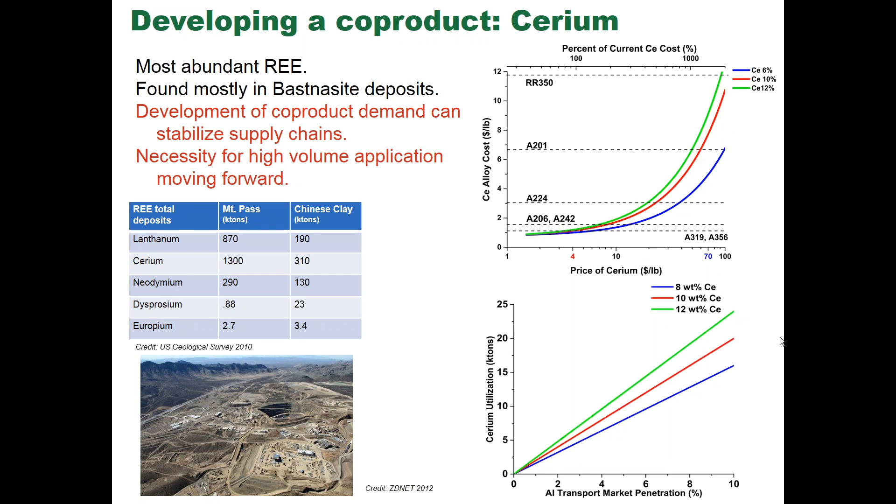And if there is a penetration into the transportation market, it doesn't take much of a penetration to use substantial amounts of cerium, and therefore meeting the goal of the Critical Materials Institute as far as stabilizing supplies of the material. So that's a little bit of the background.

We know a couple things about cerium. Some of this is known from some very small research studies, and some of this was developed through some work that was done in powder metallurgy some 30 years ago.

When you mix aluminum and cerium, you get a highly stable intermetallic, Al11Ce3. And the breakdown of that intermetallic does not begin till about 1,000 degrees C. So it's very, very stable at high temperature. The intermetallic phase is resistant to coarsening.

And what we're really trying to say is that cerium has no real solubility in the aluminum phase, and so it's got nowhere to go, and so it's thermodynamically trapped. The original research was in powder metallurgy, and the powder metallurgical results point to a possibility of fairly high tensile strengths up to about 230 degrees C. So it seemed like a possible application for a cast alloy.

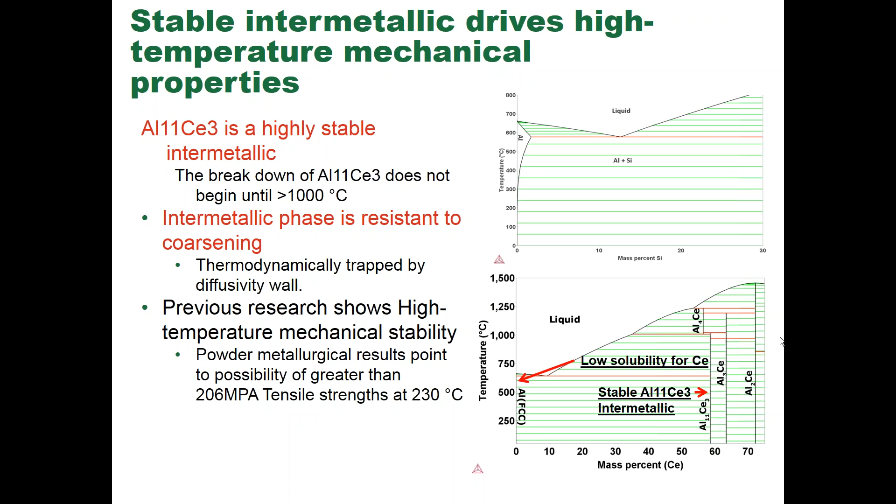Here we see some of the original microstructures that were done, and you should be able to see the various scale bars on there. What we have is a very, very small aluminum-cerium phase. When looked on edge, the rods are about 100 nanometers in diameter. When you add cerium in percentages of between 8 and 10%, you have a very, very high phase fraction of cerium in the material. The microstructure is interconnected.

If you put too little cerium in the alloy, the microstructure doesn't connect very well, and so you have denuded areas, but typically above about 7% cerium, that does not happen. And really you have sub-micron scale laths that define the shape of that intermetallic. And so part of what we were trying to do is develop a cast alloy that had high temperature properties, and was affordable and was castable.

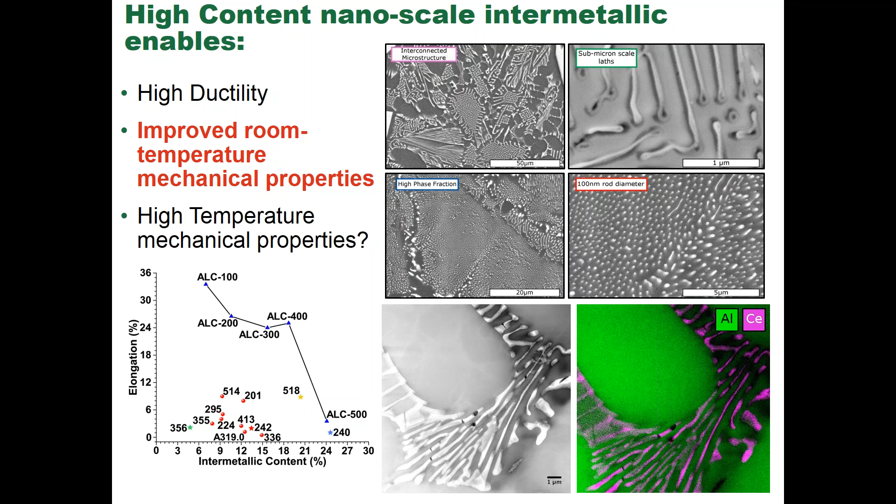In the lower left-hand side, you see the relative intermetallic content of some of the other alloys that are out there. These alloys do not have unusual amounts of intermetallics, but the intermetallics that are there are much more stable. So here's a TEM picture showing a little better that this microstructure is primarily an aluminum-cerium phase in an aluminum alloy. And you get an idea of the size. That's a 1,000 nanometer scale bar on the bottom, and pretty uniformly distributed through the alloy.

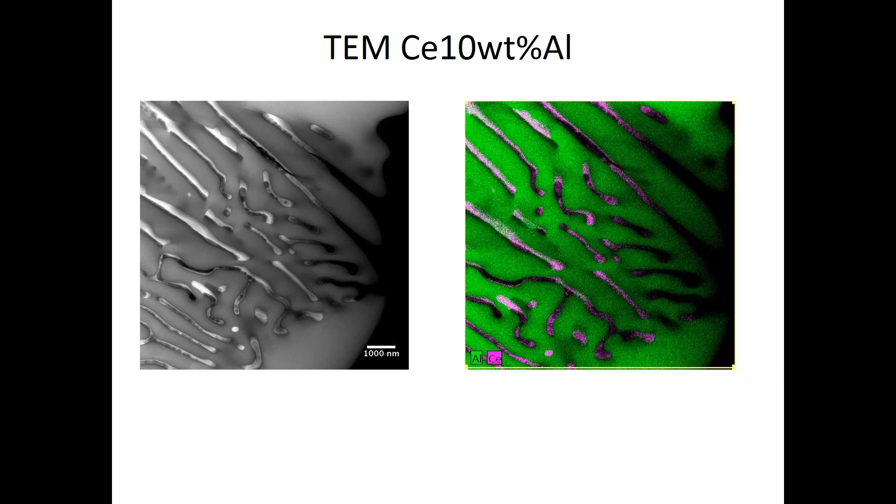There's not a lot of phase diagram information, although Mondolfo did some years ago that we believe turned out to be fairly accurate. This is a computed phase diagram done by the folks at Lawrence Livermore, and we see a lower melting eutectic point at about 10% cerium. That really gave us some hope that we would have an alloy that you could get a substantial amount of the alloying element in and not create a lot of difficult casting problems because of it.

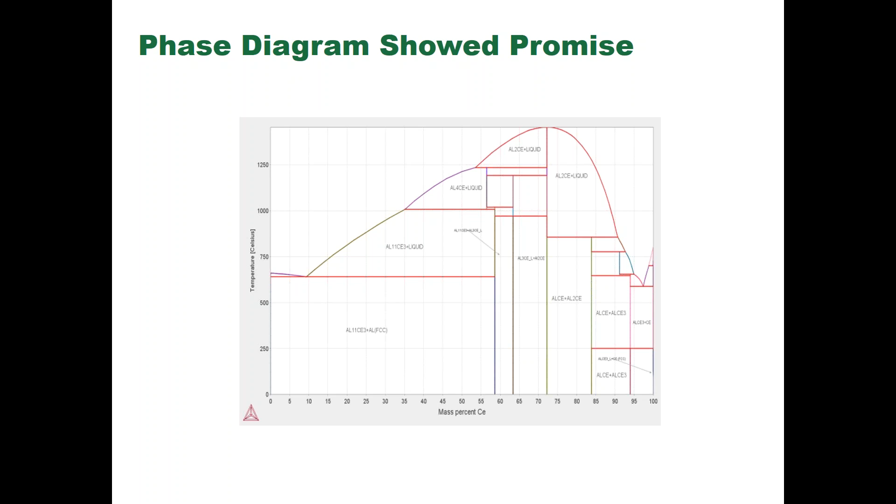I guess my reputation preceded me a little bit because the program sponsors didn't want to have a difficult to cast alloy. And so we started this with really a pilot program to help understand the castability of the aluminum-cerium alloy system. And it turns out it's really pretty good. The alloy is castable over a broad range of compositions. Not only do we add cerium, which gives us high temperature strength, but we add other alloying elements to improve the room temperature strength as well, and they also improve the high temperature strength when added properly.

We've cast over 30 different variations of the alloy. Some have been uncastable. Most have been castable. Some have developed pretty poor mechanical properties. Some have developed quite extraordinary mechanical properties. We'll discuss more, but the alloy is tolerant to really high mag contents. And so people are concerned, well, you're adding cerium, which is a high density material. That is going to make my casting weigh more. We can completely counteract that by adding enough magnesium to bring the density down to that of pure aluminum.

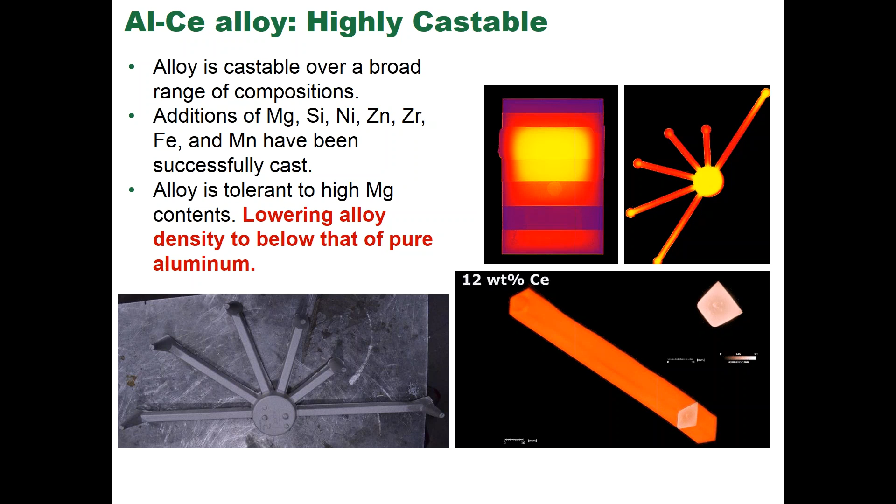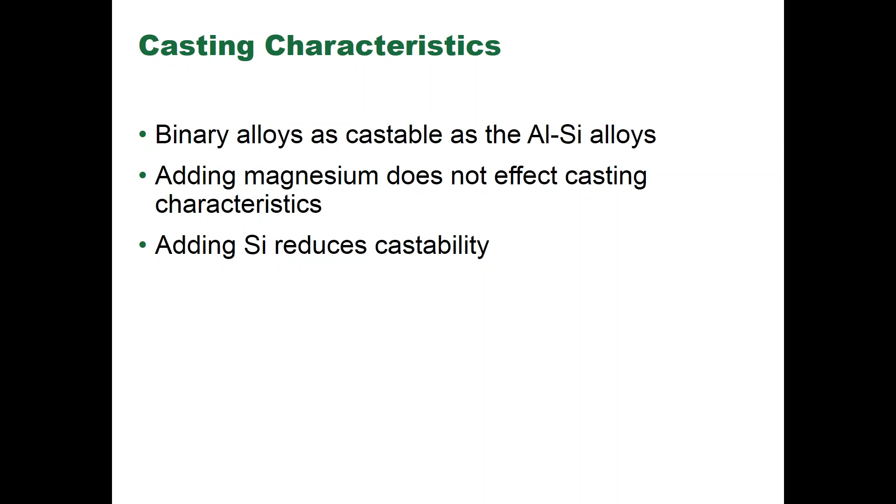Interestingly, adding magnesium does not really affect the casting characteristics. We've tried some very high magnesium levels in these alloys, and it has been successful. Ironically, for those of us in the foundry business that cast a lot of aluminum-silicon alloy, the element that has the biggest negative effect on aluminum-cerium alloys from the standpoint of castability is silicon. You're more effective in copper alloys than in silicon alloys, which is interesting, and we're not sure of all the reasons why that's the case, but we've been able to demonstrate it a number of times.

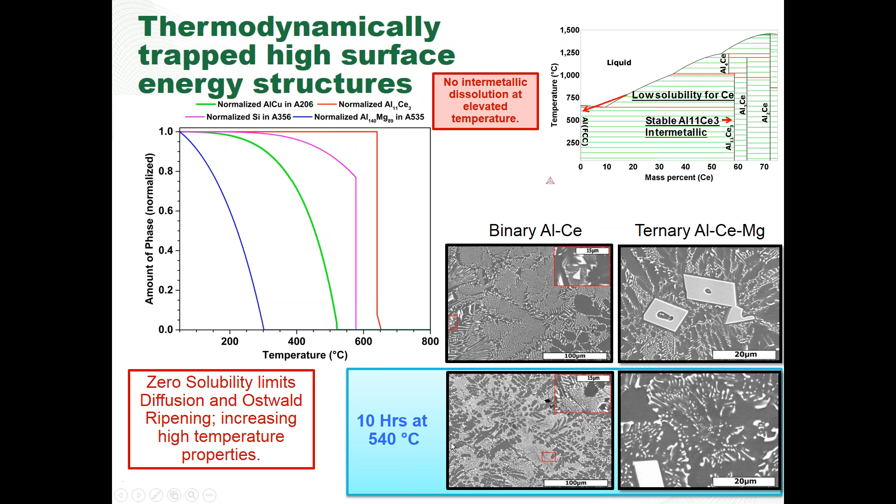at 540 degrees C. So at temperatures that high, you have some homogenization of the aluminum-cerium structure, as you do with the magnesium, but the magnesium actually stabilizes that a little bit. So you don't have any growth, you don't have any coarsening, it doesn't disappear, it's still all there after exposure for a long period of time.

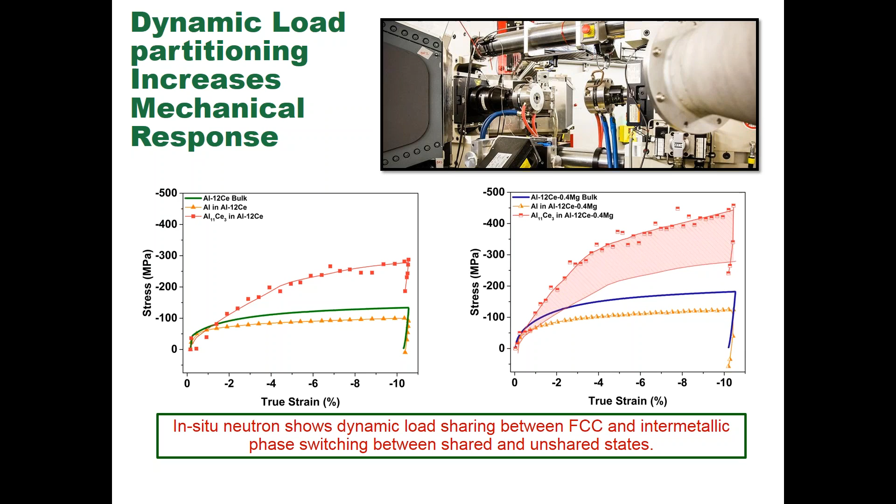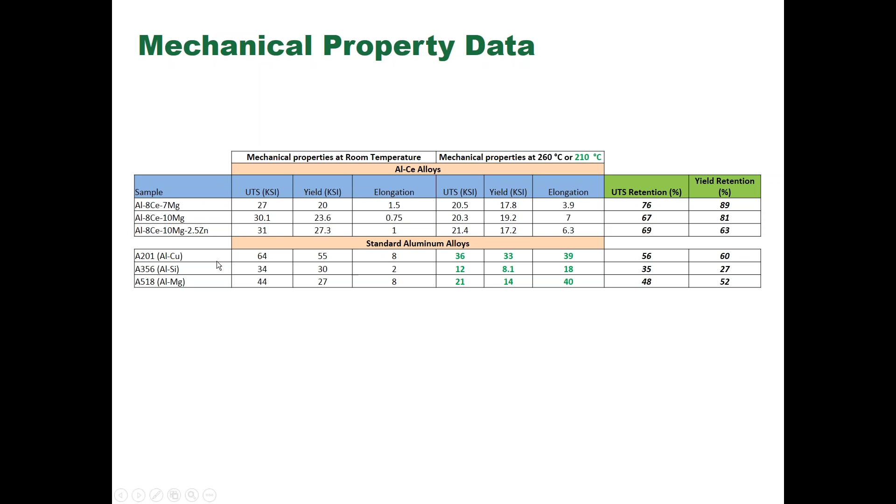So, as I think I said, we did somewhere between 20 and 30 different compositions of alloys using a lot of different alloying elements, and some of these materials responded well to heat treat, and some didn't. I'm going to go back one slide because I will add that these are as-cast properties for the alloy at both room and high temperature for the aluminum-cerium alloys. For the conventional alloys, these are all heat-treated properties. So we're getting very, very good mechanical properties actually without needing to heat treat the alloy.

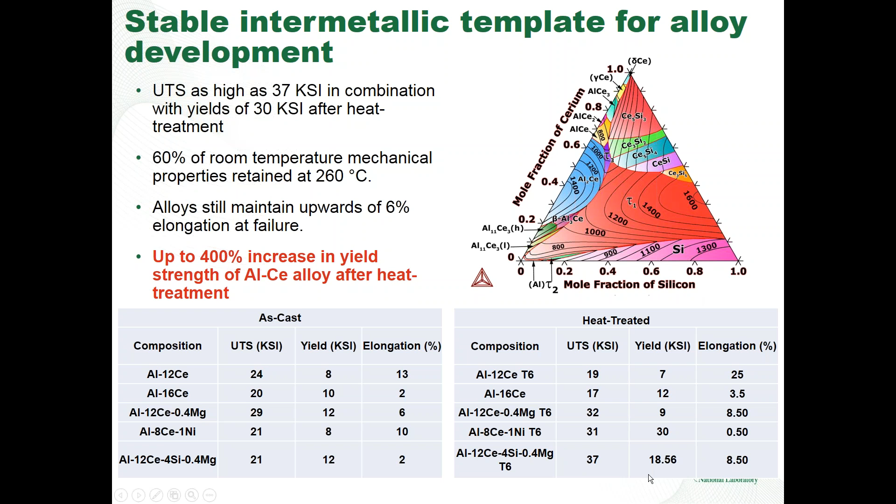And when I talk about heat treat, I'm talking about a typical type of T6 heat treatment where you're heating it up to 1,000 degrees F and then you're quenching it. So they really don't have much of a response. Once you start adding elements, then you get a lot of response to the heat treat, because you end up with more traditional kind of heat treat response. You get a good response in the cerium nickel series. There's a lot of work that has to be done on heat treat on some of the alloys, particularly those that are not primarily magnesium alloys.

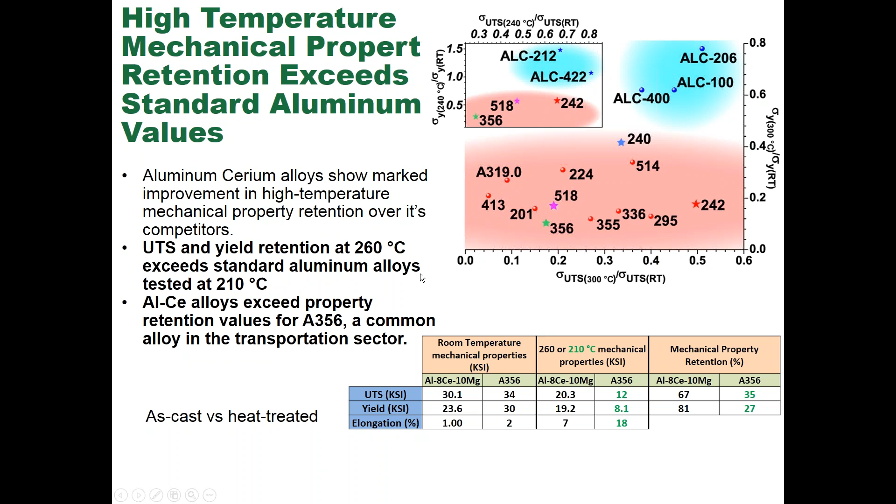Again, this bottom graph is kind of a rehash of the last slide a little bit, but room temperature mechanical properties in a 10 mag alloy, and they're pretty close. Yield strength is higher in 356, but then when we look at high temperature properties, it's very good. And again, the aluminum 8% cerium alloy was not heat treated at all. Those are the as-cast properties.

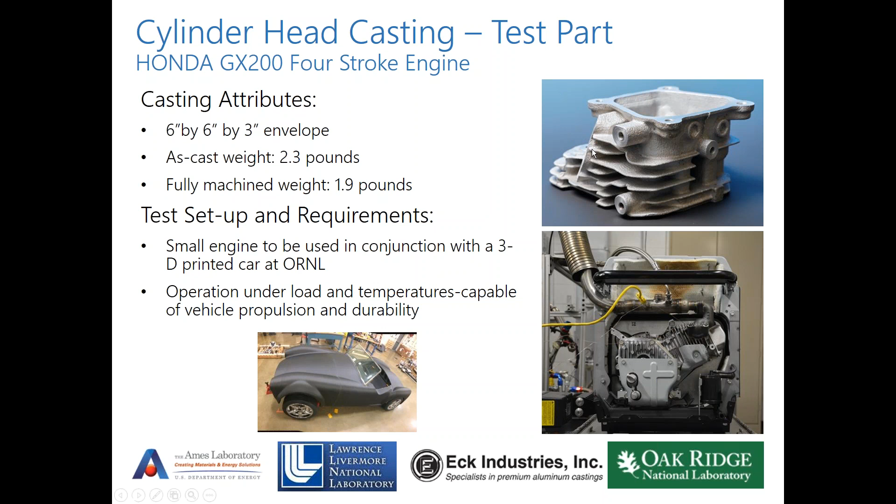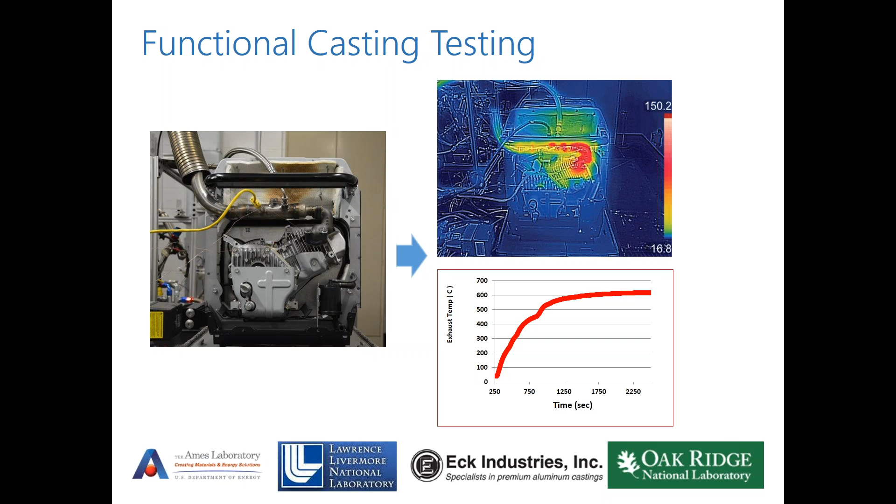And then it was tested. The vehicle was actually driven. There were exhaust gas temperatures of at least 600 degrees C, and everything went well with the demonstration. There's work going on with our conventional customer base in these alloys in projects of their own that we're looking to participate in.

One of the very interesting things, at least to the team, is that when you take a typical cast piece of the 8 cerium 10 mag alloy and you extrude it and you align most of the aluminum cerium, you get very, very high mechanical properties. And again, this is except for the temperature that went into the extrusion billet in order to allow it to extrude. It had tensile strengths in excess of 50 KSI with a 6% elongation in the extruded alloy.

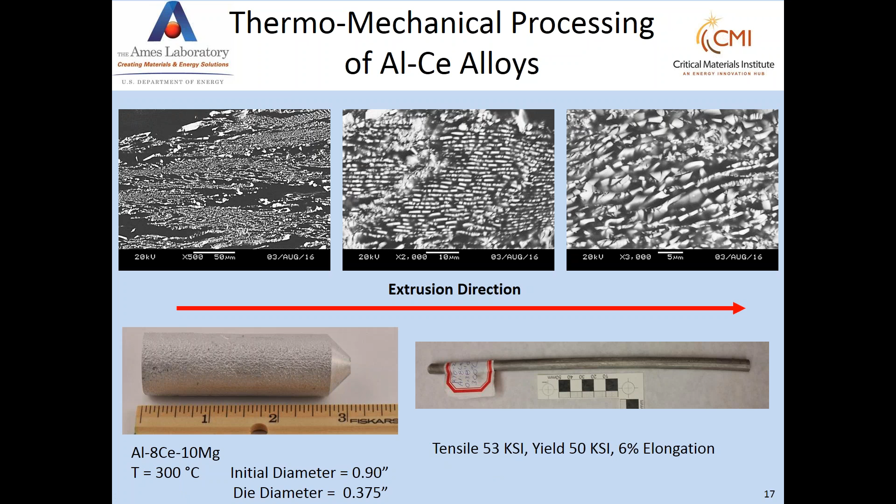So this is a combination of some alloys that are ready to go, some that continue to need development. We are continuing development to improve the room temperature mechanical properties. All of this work was done without making any attempt to do grain refining or modification of the structure. So that's work that's going on right now. We're trying to find optimized heat treat for a number of these alloys.

Again, the response in general, because cerium slows the diffusion of almost all the elements involved, we will likely need to heat treat at fairly high temperatures in order to get anything to move. And we're still trying to discover and quantify missing alloy phases that should be there, that we're not seeing, but we know they're there because of the effect they have.

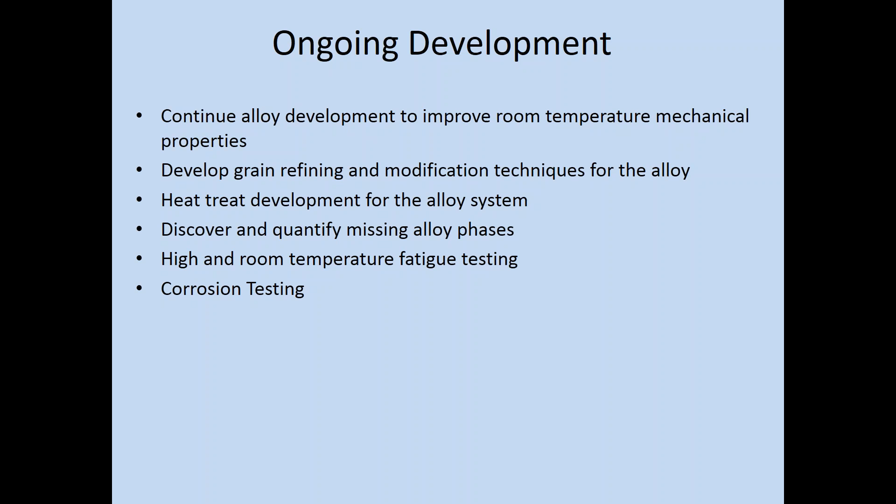We're doing high and room temperature fatigue testing as well as corrosion testing. Although Oak Ridge did some preliminary corrosion testing and it was very, very favorable, so we don't anticipate any problems there. So kind of in summary, these alloys are highly castable, tolerant to casting defects. If you cast any of the binary alloys or the alloys that contain magnesium, you would say that they cast just like 356 does. The combination of your phase constitution and microstructure enables unique mechanical properties, certainly at high temperatures.

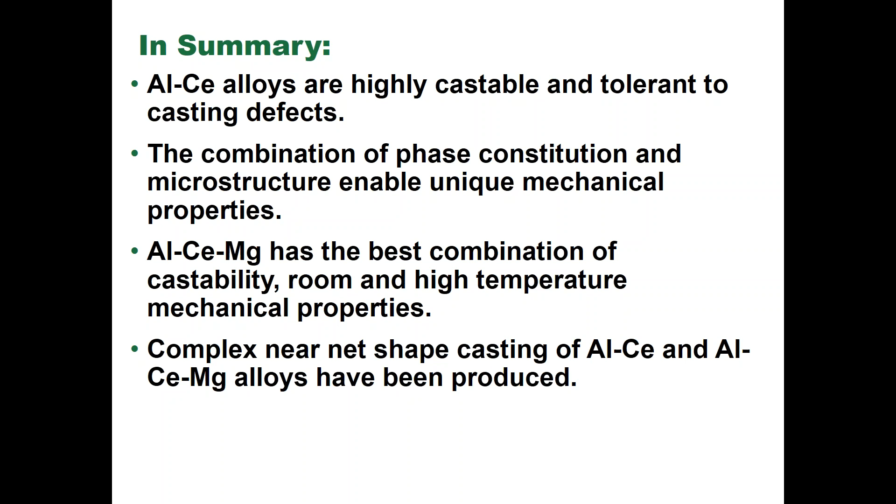The aluminum-cerium mag alloys have the best combination of castability, room and high temperature mechanical properties, although we're continuing to work on improving those and looking at other alloying elements that will help improve those. And complex near-net shape castings of aluminum-cerium and aluminum-cerium mag alloys have been produced, and some of them are being evaluated for applications, in particular where operating environments are either steady state at higher temperatures or intermittently at very high temperatures.